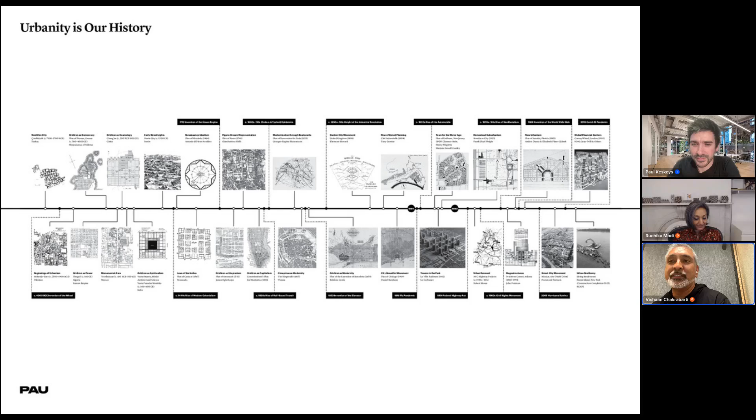So what is that exactly? It's not size. It's not about big cities necessarily. And it's not about elitism. It's really about diversity and where different people can come together, creating a culture of difference, which can happen in a village, it can happen in a metropolis. And it's different than just this idea of hanging with your tribe. It's really about confronting difference face to face, in real space, in real life, as in contrast to social media. And this way we can celebrate difference as something that moves culture forward.

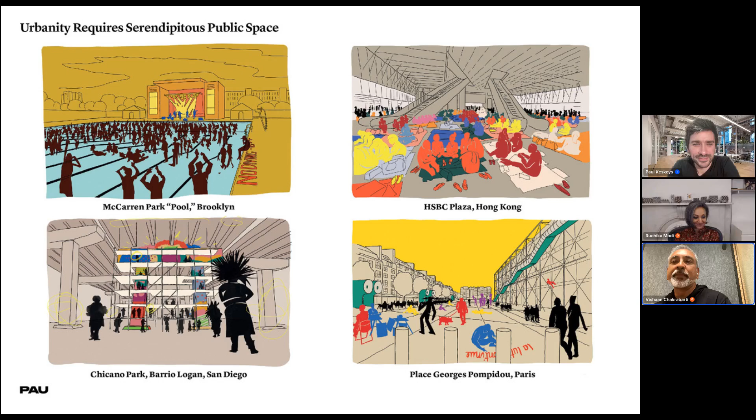Urbanity requires the serendipity of public space, not just as we designers design it, but as people use it, as communities use it as they see fit. And these are wonderful drawings done by a gentleman named Mark Faulkner in our office to explain that idea. We know urbanity, true urbanity, is conducive to public health. We know actually that the strength of people's social bonds actually lead to more longevity and more public health. We know that it advances progress. This is a Charles Correa diagram of Doxiadis' theory about different people creating progress in density.

And so this is what we try to promote in our office, what we try to build. This is our office in Union Square in the heart of New York City. We came out of the gate about 9 years ago with this mission statement that we are dedicated to building ecological, equitable, and joyous communities.

And talking about not only what we do and what we don't do. So this is really what we do. These are the practice areas that we do, but it's also the process of co-design, working with communities. And we have a motto in our office, which is that place needs connection.

It actually responds to a method, this idea that we read place in terms of climate and context, that we establish needs with not just our client, but the community. And through place and needs, we build connection at the scale of the individual through construction, at the scale of the community through the city, and at the scale of the planet through the climate.

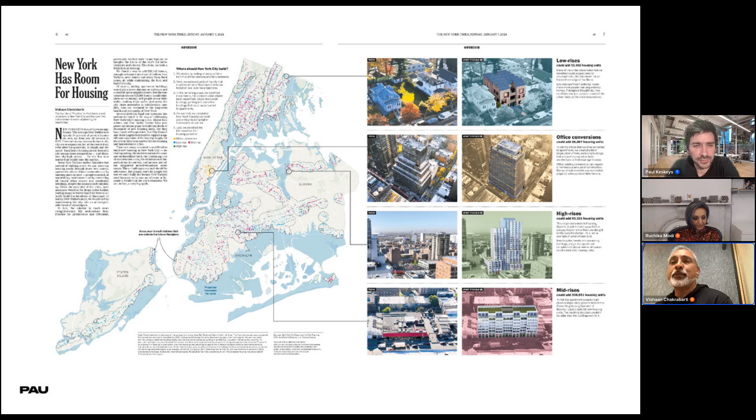We started with a lot of advocacy work. We continue to do that advocacy work with partners like the New York Times. You might have seen our housing article last January about how we can go on road diets and use our streets for public space. And this has all led to a diversity of experience from urban planning to large scale architecture projects, institutional work. And we're just going to talk about a couple of those projects now.

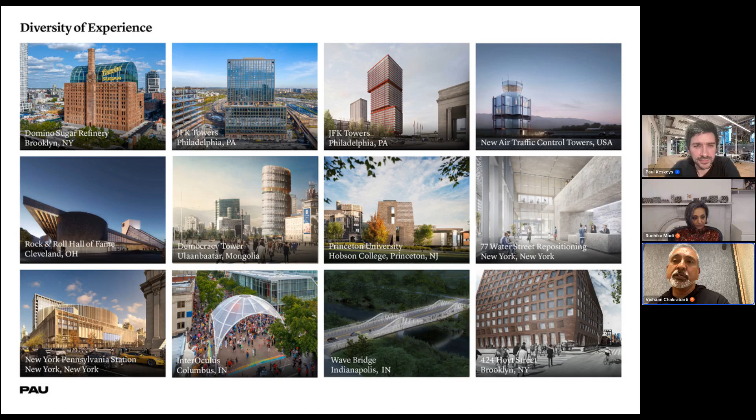Our first built work, InterOculus, this is for the Miller Prize in the wonderful place known as Columbus, Indiana, which of course is a mecca for architects. I probably don't have to explain what it is to this crowd. You're looking through the Pei Library at Henry Moore to a church by the first Saarinen. And we won something called the Miller Prize, where you're asked to do a pavilion structure, something actually usually temporary.

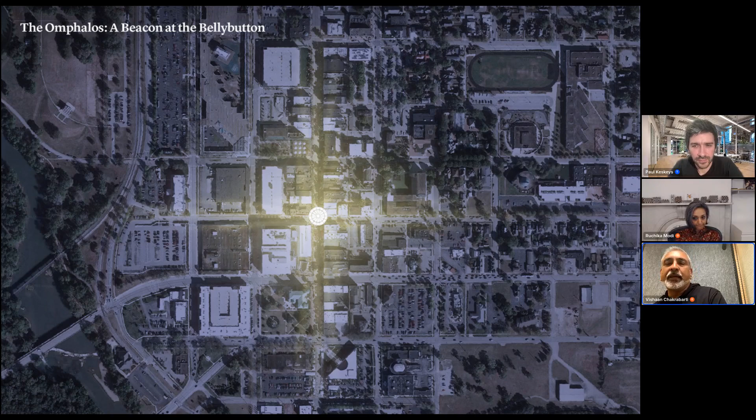We did a great deal of community engagement with students in the town, Zoom calls, ice cream parlors, and we were given this assignment of revitalizing downtown. And this is an adaptive reuse project, but of an intersection where we knew in this intersection that a lot of cultural activities happened. And we looked at everything from the Pantheon to the wigwams of the indigenous people that are from that area, as well as kind of the honky tonk architecture of local state fairs.

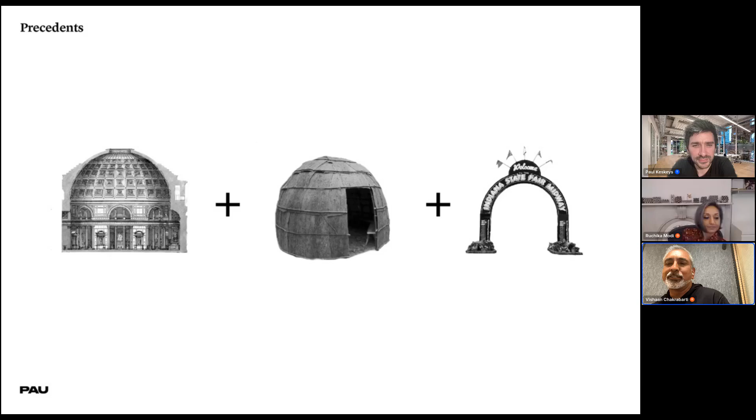And we presented the community with this drawing after hearing that they wanted this gathering space. Because the thing that's amazing about Columbus is it has all of this world famous architecture, but it has very little public gathering space other than some beautiful parks that are directly outside of the downtown. And so this we thought we could solve by creating this canopy and creating an invitation for the community to close the streets and use this space for lots of events.

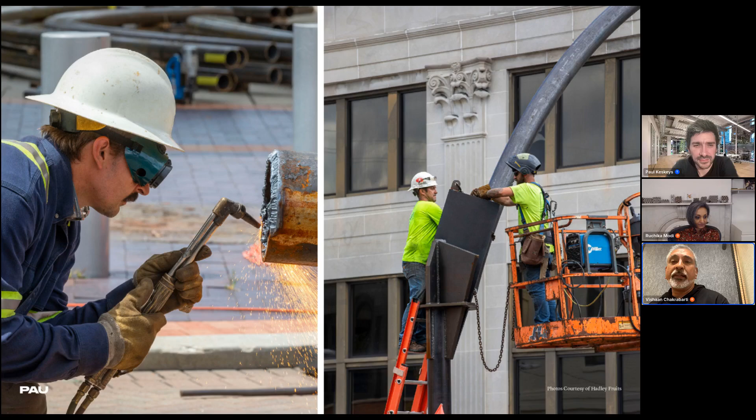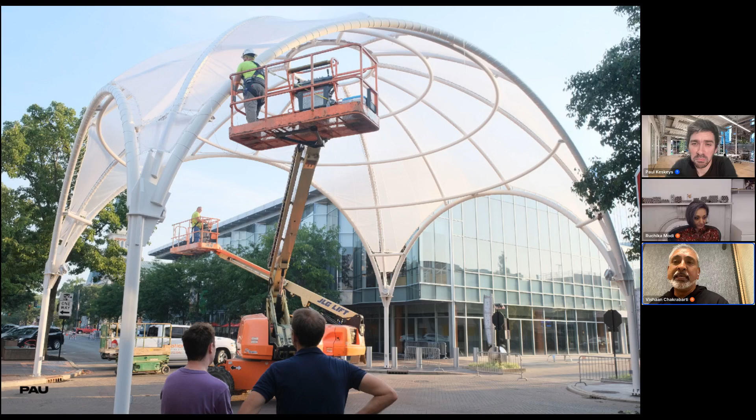And this became so popular that they not only approved it, but we actually had to raise more money to make it not permanent, but something that would last over time. And so we were the general contractors as well as the architects. We built this thing in a matter of weeks, and you see it going up. And there it sits today in the heart of Columbus, Indiana, and it sits there for parties. It sits there for snow load, and it will be there for some time, we think.

And it's sustainable because it will be there for some time, and it's not temporary. And it is a place for gathering. It is a place for the culture of gathering. And we've seen in this little town enormous diversity from African American communities to Japanese American communities to South Asian people who come and celebrate this place. Pride Week in Mike Pence's Indiana, really extraordinary expressions of joy that happen under this simple canopy structure.

And this reminds us of one of my favorite Aldo van Eyck quotes: whatever space and time mean, place and occasion mean more, because it is about how people give meaning to architecture through use. And so that brings us to kind of the main project we're going to talk about today, Domino. Ruchi worked by my side, as she did with InterOculus, on this. So we're going to talk about this in two phases.

I've been working on this site for over 10 years. First, when I was a partner at SHoP Architects, when we were doing the master plan, which was authored under SHoP, and then with Field Operations and Lisa Switkin, a brilliant landscape architect. This is an 11-acre site that was separated from the community. And actually, there's 4 communities around here, an Orthodox Jewish community, an African American, a Latinx community, as well as a kind of hipster community.

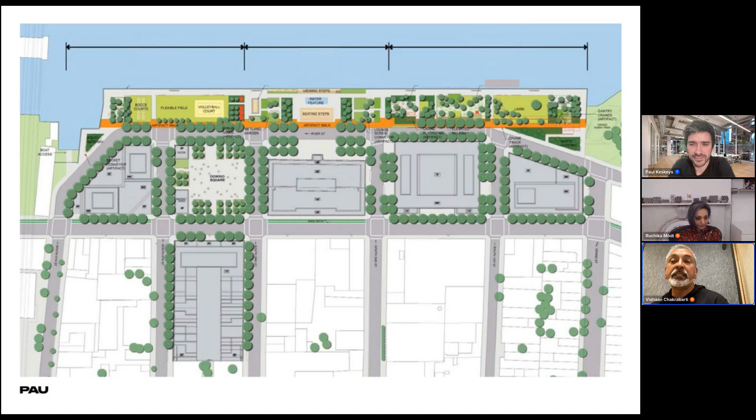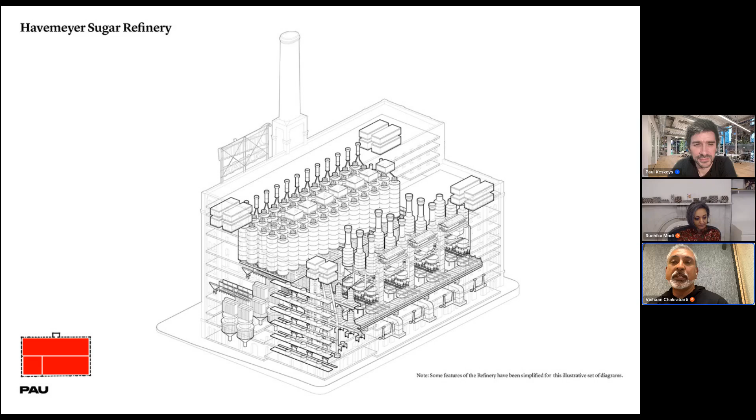And so years later, after we formed PAU, PAU was given the commission to put a creative office building with lots of public space at the base of the building, and create a new piece of architecture out of this. The only thing is the building wasn't a building. We did this drawing to explain to the Landmarks Commission and the public what the building was, which was an envelope for machinery. And so the fenestration, the facade was actually largely fake. Those windows didn't correlate to floor plates. They correlated to a lot of machinery inside.

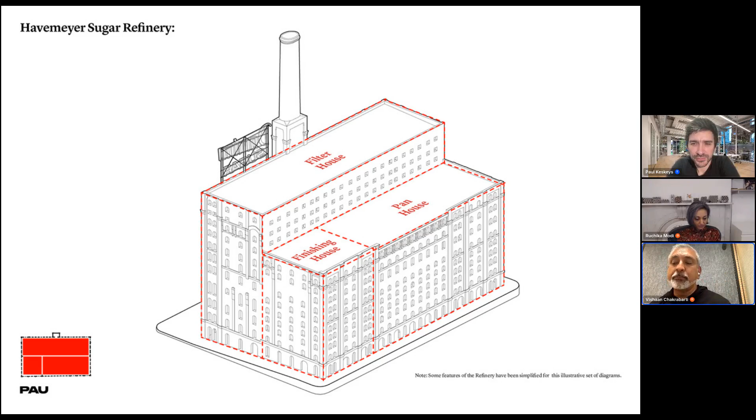The building was actually completed as three buildings. There had been a fire on this site. The building burned down. The Havemeyer family rebuilt it as these three buildings. Because there were three buildings and because the windows didn't correspond to floor plates, the windows didn't line up at all across the building. And so when the client first called, he said, we have to put this building in, but none of the floor plates will resolve across the different sill heights. It's really hard to get light in the building with small windows.

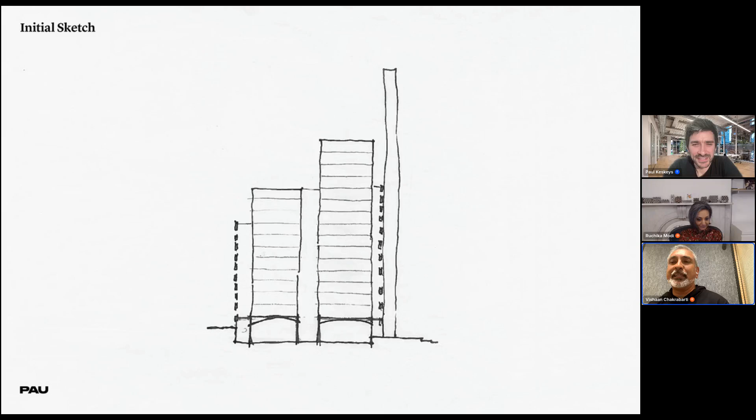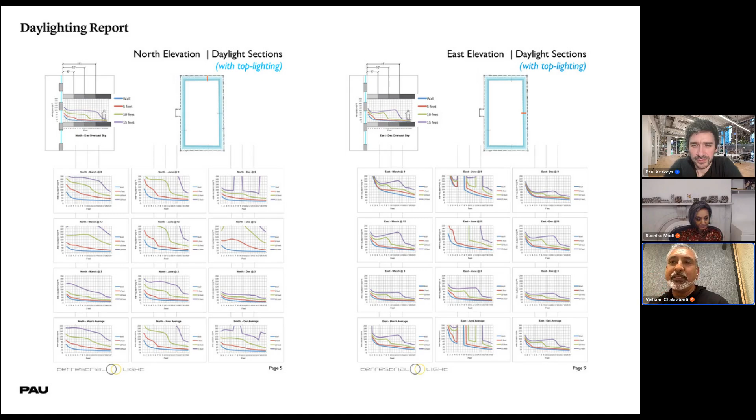By the way, if you learn about sugar refinement, you will never eat refined sugar again. It's disgusting.

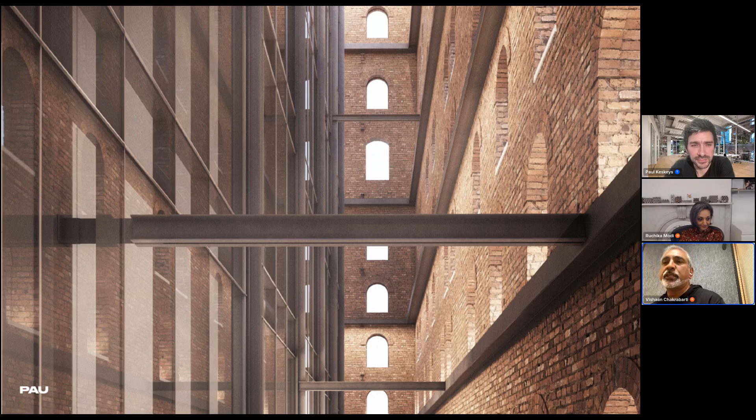But basically, we went to Landmarks with this photograph and with this idea of wanting to build a building inside of a building and said, we can emulate that historic condition in a new condition with new steel tiebacks, new ring beams, which Ruchi will talk about, with a modern curtain wall held back from the original brick facade. It would snow and rain in this space, and this would bring light into the core of the building, into the center of the building. And that is that image going from rendering to photograph.

Lisa Switkin from Field Operations, our landscape architect, had this idea of planting these pin oaks. There's all this biophilia. There's biophilia on the ring beams. And so it's absolutely magical inside. The light is extraordinarily magical inside. And so we're very proud that we were able to execute this very complex idea, but actually something that's quite elegant, of this new building placed in this old one.

This is an image from inside the building. So the brick actually acts as a thermal barrier, a solar shade. The light in the building is never too bright. There's never too much glare. I'm going to make a daring comparison and say, I love the light in the Kimbell, Kahn's masterpiece. I'm not going to compare it to the Kimbell, but there is an ambience to the light in the building that comes from these layers that I think is really quite extraordinary. So I'd encourage you to visit inside of the building if you can.

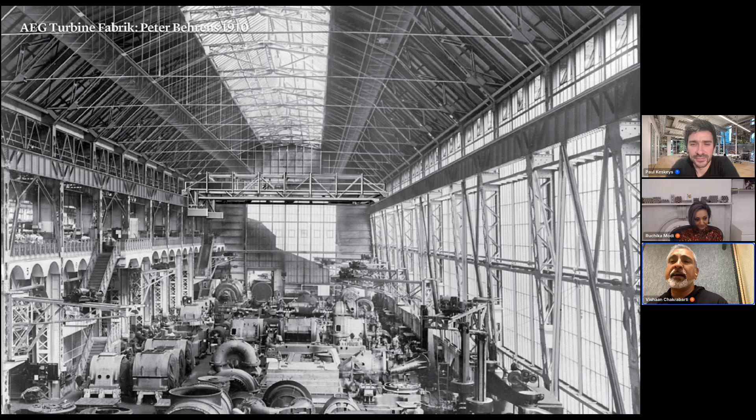The next issue this raised of this building inside of a building is this pushed some of the development rights above the height of the brick. And so the question became, what should the form of that be? And we tested about 45 different forms, and we kept coming back to a couple of precedents. This is, of course, Behrens' turbine factory and that vault, but also the fact that the original building, and you can see the brick windows there, were built in the American round arch style. I mentioned that the earlier building had burned down.

What happened with factory buildings is the wood lintel that held the brick above the window often caught fire in factories in the late 1800s. And so the American round arch style was developed to eliminate the wood lintel and create a brick support system as a fire retardance device, which we thought was an incredible piece of innovation that we wanted to pay homage to in terms of this simple, elegant barrel vault. The barrel vault also did a number of things.

It did what arches do. We eliminated all the internal columns, and we were able to then land the foundations further from the original brick foundations, which, as you can imagine, are not plumb. It's an old factory building. And so there were a number of efficiencies gained by using this vault.

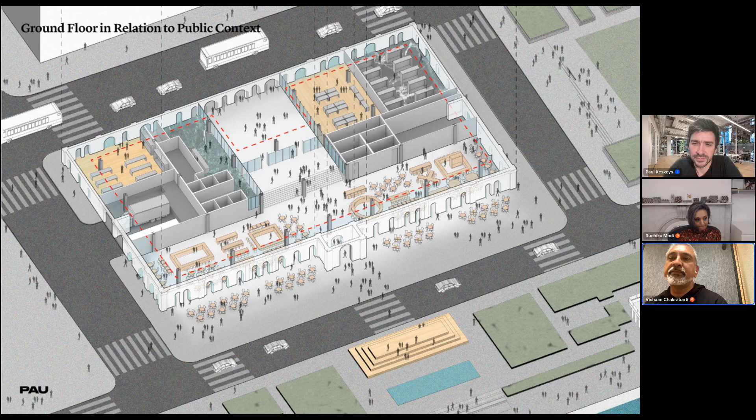The other thing about this, we've talked about the sky plane and the way the barrel vault came about, but it's also important. We're always very focused as an urbanist firm on the way buildings meet the ground. We had worked very hard on the master plan at SHoP and at Field Operations. And so we wanted to make sure that as PAU did the architecture for this building, that we really made the building as porous and as open as possible, opened up the windows to door height.

I want to say the Landmarks Commission and the Landmarks community were extraordinary. They went with us on this journey of this barrel vault, of taking out a lot of the old cracked windows. So we don't think of those processes as bureaucracy. We're building in people's neighborhoods, we're building in people's communities, and we think we owe it to them to have a conversation and a process with them about what goes there. And we think the project is better for it.

And so that's what the project looks like today. You can see how that plaza in front of the building that Lisa is designing with those big open brick portals are now ready for the bars and restaurants and cafes that are going to spill out onto them and make this a truly urban experience. That is only one part of this narrative.

Ruchi's now going to tell you a more in-depth story. Ruchi is, I think, the most talented architect with whom I've ever worked, and understands this project from cradle to grave. And so she's going to take it from here, and I'm going to go catch my flight.

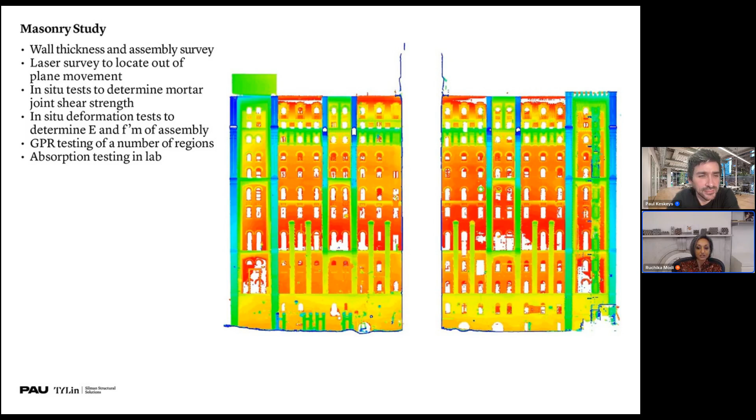A comprehensive masonry survey was conducted to make sure that what we were proposing was appropriate and would in no way compromise its integrity. We were, after all, exposing the interior face of the masonry to the elements, and also to evaluate the level of rehabilitation, the intervention that would be needed, which we wanted to keep to a minimum to preserve the patina.

So the test revealed that what we were dealing with was relatively hard brick of good construction quality, and that the brick on the inside face of the wall was also of exterior quality, which was a serious bit of good luck there. However, the good quality of the masonry notwithstanding, we, and by that I mean our excellent structural team at Silman, led by Pat Arnett, still had to come up with a plan to temporarily brace it during demolition and construction, which was a project unto itself, and actually with its own set of construction documents.

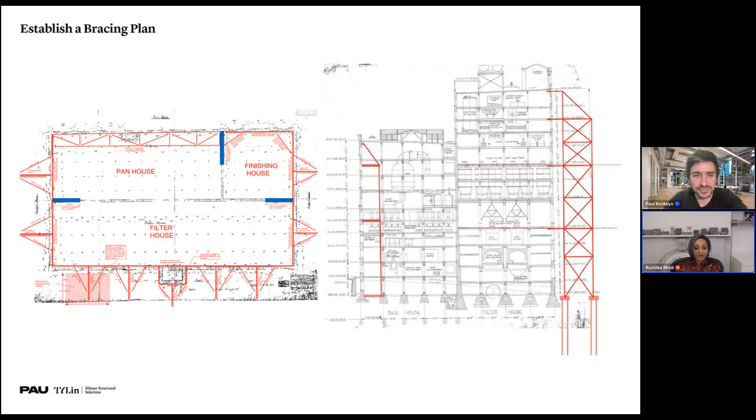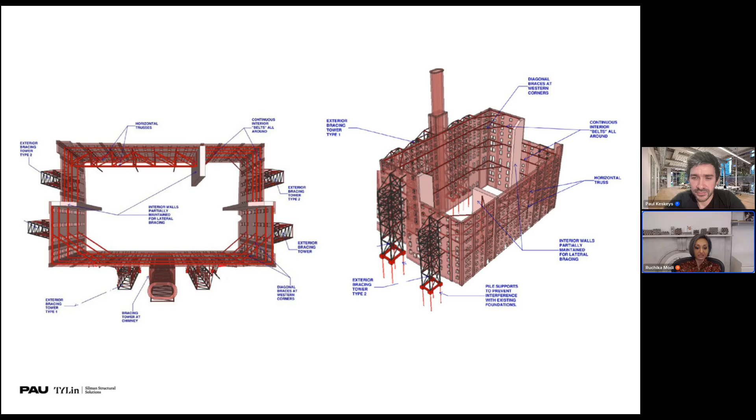So this is what that temporary bracing looked like. It was a combination of bracing towers up against the facade and horizontal trusses on the interior where we didn't have room on the street side for the towers, all tied to continuous interior belts holding the masonry facade up while the historic structure was carefully dismantled, literally piece by piece. And this is what it looked like, deceptively simple from the exterior.

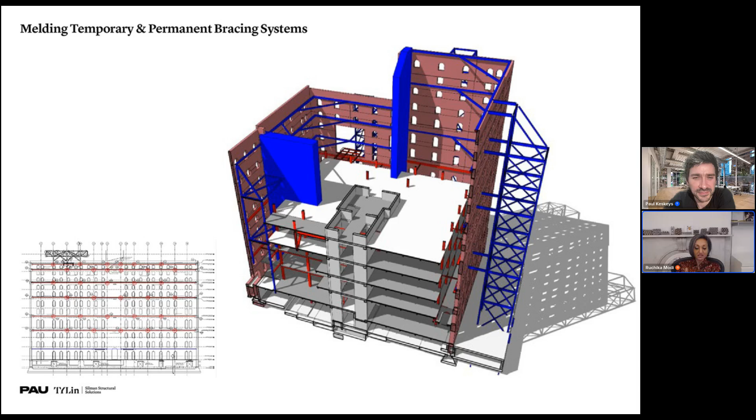Because on the interior, it was anything but. There was this intricate choreography of melding the temporary and permanent bracing systems. The latter obviously had to follow the former, while the former had to be situated so that it didn't interfere with the latter. So you see what I mean here. It kind of looked like a jungle gym on steroids for a while there.

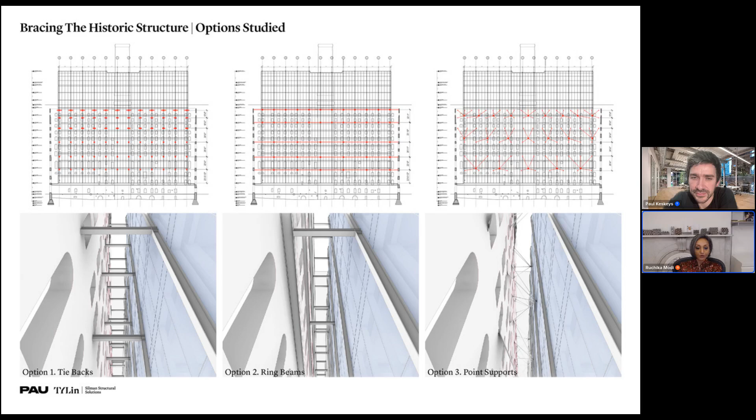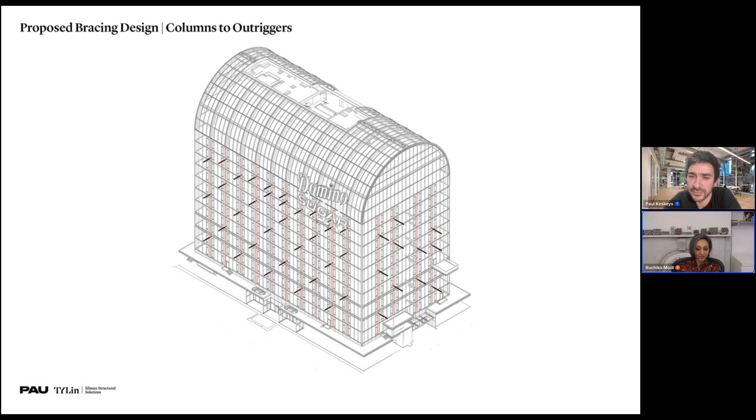Which brings me to the permanent masonry bracing system. So these are some early options we studied, like a whole range. And actually we started off trying to see if it was possible to avoid breaching the curtain wall. Could we have a structural element on the exterior of the curtain wall to tie back the masonry to? But eventually we settled on one that did need to negotiate the curtain wall. So we have outriggers from the columns going through the curtain wall to ring beams all around that stabilize the masonry.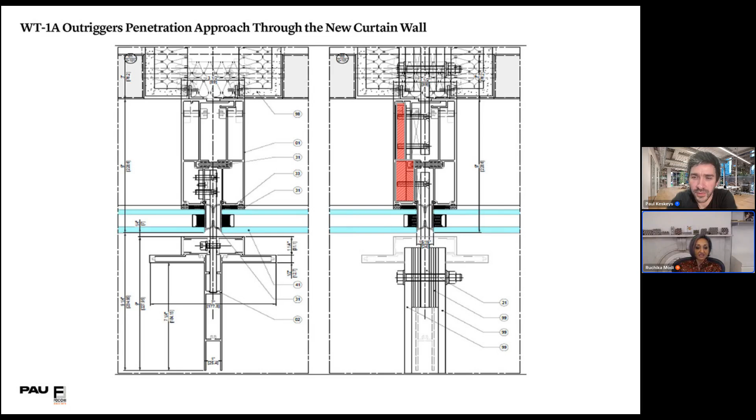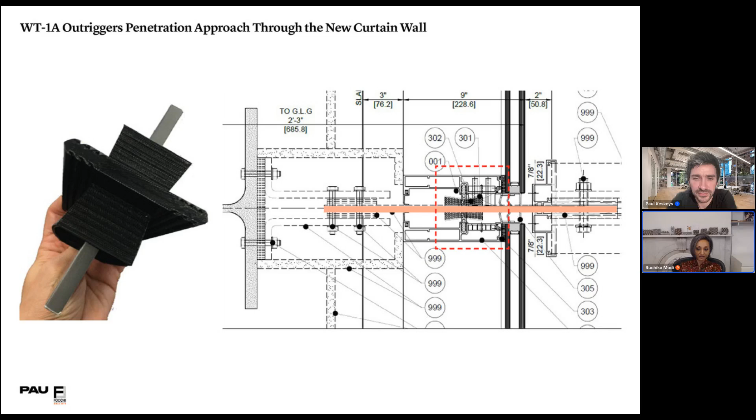It's really important to note that this detail would not have been possible with a standard male-female system of interlocking extrusions, but it was possible with Focchi's. Focchi was our curtain wall manufacturer, with their custom fully gasketed female-female system. So to make sure that the system was air and water tight with the outrigger penetration, Focchi developed this custom gasket that you see on the left, which wraps around the outrigger, making a flexible connection to allow for movement and yet maintaining that air and water tightness.

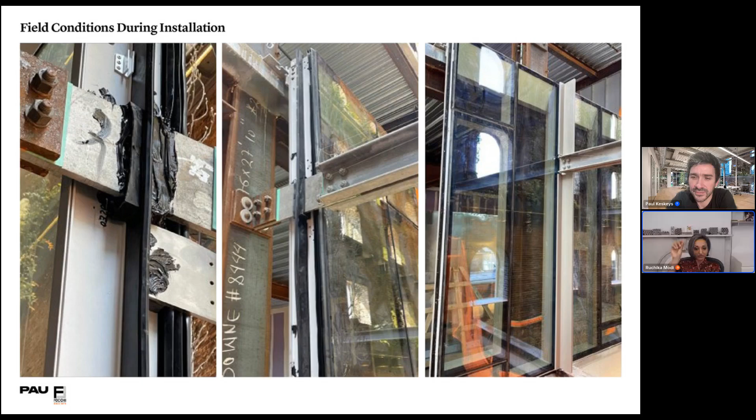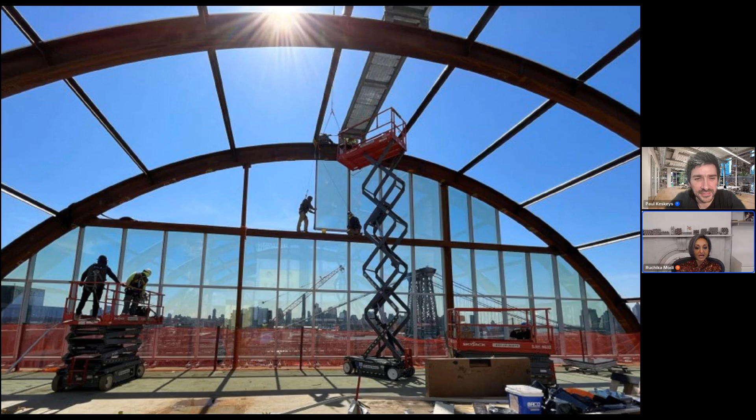So some installation photos. Here on the left, you see that custom gasket around the outrigger and how the outrigger kind of slots into the vertical mullion profile. And now moving on to another curtain wall type. This is the end caps of the barrel vault. So we wanted this expanse of wall to be as light and free of structural elements as possible, which was kind of the main engineering challenge here. The lower panels are double height, they're up to 22 feet with curved extrusions at the perimeter. And you can see here why transparency was of paramount importance.

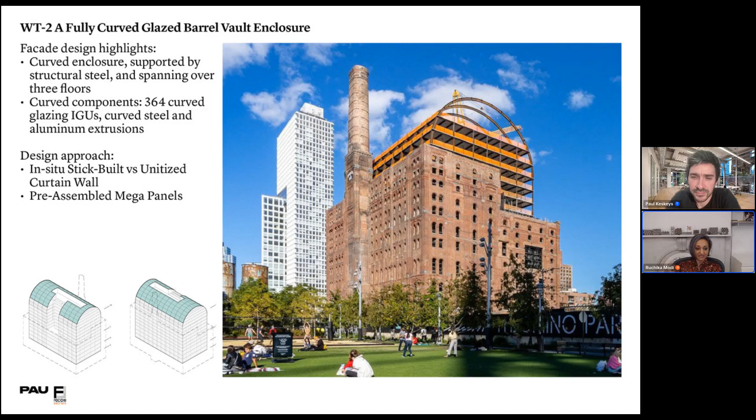And then, moving on to the crowning glory of the new enclosure, quite literally, the curved glazed barrel vault, which spans almost 60 feet over 3 floors. So we started off studying all different kinds of systems. We studied a stick-built system, which was prohibitive both in terms of labor cost and time. We studied a fully unitized system, which was a no-go because of the complexity introduced by the curvature of the facade and the fact that it's pretty much actually not a facade, but a skylight. It transitions from one to the other.

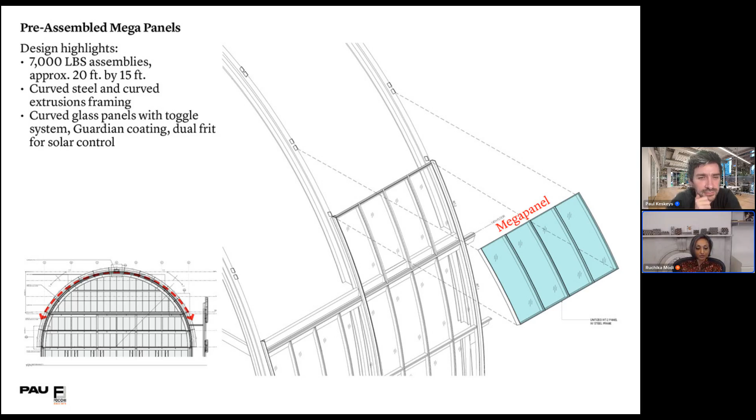So we went with a pre-assembled unitized mega panel, approximately 20 feet by 15, spanning between the curved structural steel. Each panel has a curved structural steel frame with aluminum carrier frames, curved IGUs. These are true hot bent curved IGUs with low E coating, inner laminated lights, and a dual frit for solar control on the top 5.

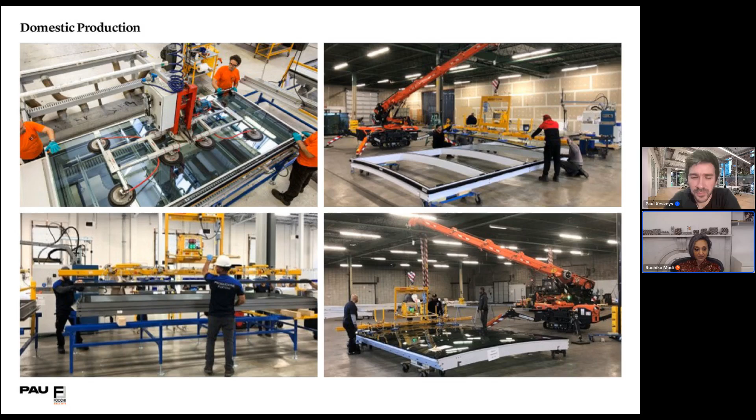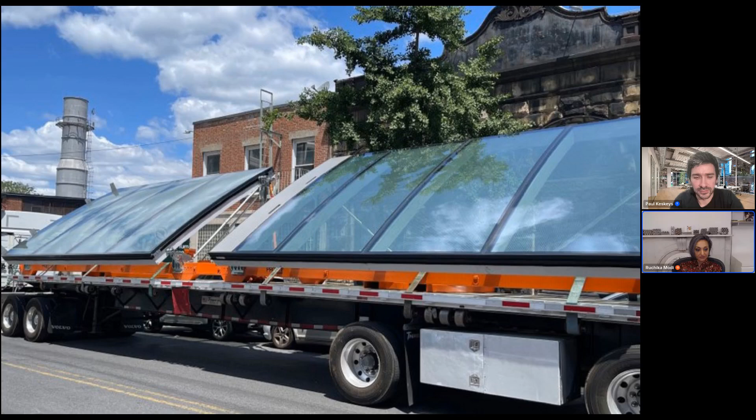A mock-up was tested off-site, obviously. And then, by the way, all of this took place during the pandemic. So this was literally the height of the pandemic. So with all the attendant uncertainty and disruption, Focchi decided to move the assembly of the mega panels from Italy, where they're based, to a facility in Connecticut. And that's where the mega panels were assembled. So you see here. They were then loaded and trucked and craned into position, which was a bit harrowing to watch, actually.

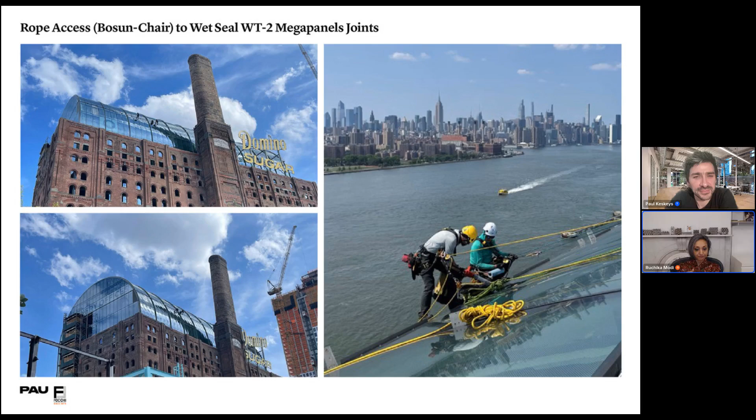And then wet sealed. So there was rope access provided to apply the 2-line wet seal. And that's the last of the mega panels being set into position. The entire curtain wall installation took 6 months. And that was reduced from a 9-month schedule by overlapping the installation of the lower floors with a spider crane and the upper floors with a tower crane. And that's the final product. It's not finished yet, so there's no finished floor. You're just seeing the structural slab, but the curtain wall portion of it is finished.

And here you see it in action. That was actually the opening party almost exactly a year ago. So, it's a place of gathering. And Vishaan talks about serendipitous encounters. And certainly this is a place for that, because it's meant for both the office tenants, but also the larger public, based on what kind of an event is occurring here. It's a place of joy and celebration.

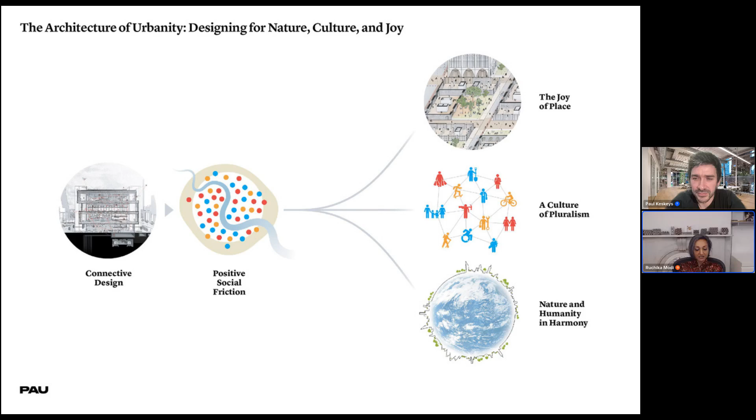So I'm gonna conclude by saying it's really a testament to our belief that the architecture of urbanity, what we refer to as connective design, can truly help engender joy and this culture of pluralism and harmony. We literally witness it here in action every single day. And finally, I'm going to leave you with this vision, which we at PAU believe is not only achievable, but also imperative: to dream of a world where nature and humanity can coexist in perfect harmony.

And I think that brings us to the end of our presentation. Went faster than I thought it would. I think Vishaan rushed.

No problem at all. You just told the story so beautifully and so clearly, and I think you led us on a visual journey there that I just found absolutely fascinating. I think this was already one of my favorite projects in New York before this presentation, and now it's even more so. Huge fan of adaptive reuse as a kind of genre, and this is really an extraordinary example. So thank you so much for sharing. There are a few questions coming in, but I'm a total nerd for this stuff, so I have a couple for myself as well before we go to the audience questions.

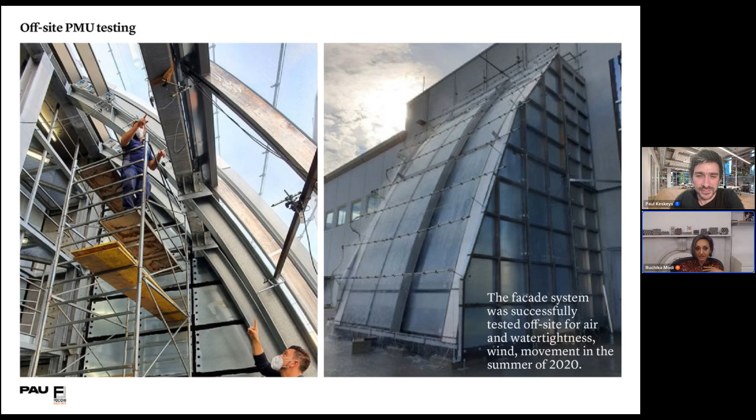So they basically charged Focchi to see if they could cut down on the construction timeline, which is typical. I don't know any client who wouldn't want to do that. Time equals money. There's general conditions. There's all kinds of overheads and costs that you can save on if you can save on construction schedule. So this was something that Two Trees asked Focchi to look at.

We had the mega panels on the barrel vault, a totally different type of installation, and we had the unitized panels below the barrel vault. One was going to be installed using the crane, and the other one using scissor lifts from the gap in the perimeter. So they came up with this idea that they could do the two simultaneously, and the threshold floor between the barrel vault and the straight wall is a unique condition, which I actually didn't end up presenting.

That's also a bent panel, but it's not a mega panel, and it's not a hot bent IGU. It's actually a cold bent IGU, which you can't really tell. So that's a unique condition, which kind of bridges the two different systems. So we had to come up with a slightly different detail for the spandrel over there, because that was the last bit to go in.

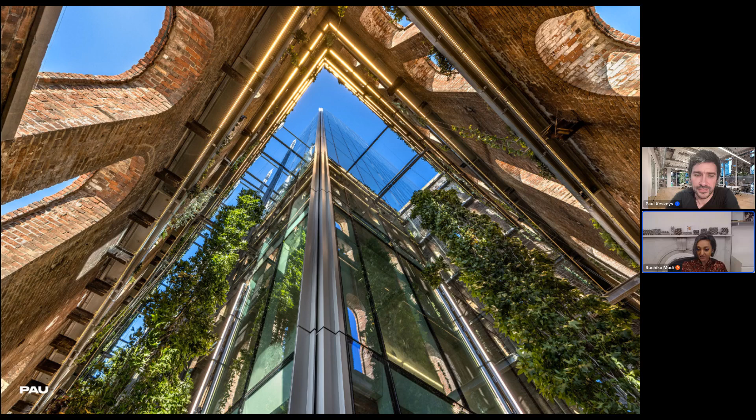So instead, we did go through landmarks, and that's something you can't avoid. You have to go through landmarks for a building that's been classified as a historic building. But there, it's a much more subjective process. So you have the board, the landmarks committee, and you have to present to them the design, and they will evaluate it on a case-by-case basis. So they, as Vishaan mentioned, from the very beginning, were very, very intrigued.

At first, let me just say, this is not a typical adaptive reuse project. Maybe it's becoming more typical as we move along, but especially back in 2018 when we presented it, it was not typical. New interventions in historic buildings should not be this bold. They're usually a lot more subdued and a lot more hidden. And you usually try to preserve as much of the historic material as you possibly can. And here we were, proposing this very big, bold barrel vault jutting up beyond the historic building. We were pretty much removing all of the innards, but as we explained, those innards were basically machinery and not conducive to the current program that the building was going to be built for.

And we also proposed removing all of the existing windows. But there, we were able to prove that those existing windows were of dubious historic value, because most of them weren't original. They had been swapped and changed over time. So the vintage was pretty much unknown and varied. Most of them were in terrible condition, falling apart. They would not have met any modern-day criteria. So we would have had to remove all of them and reproduce all of them, which again, defeats the purpose.